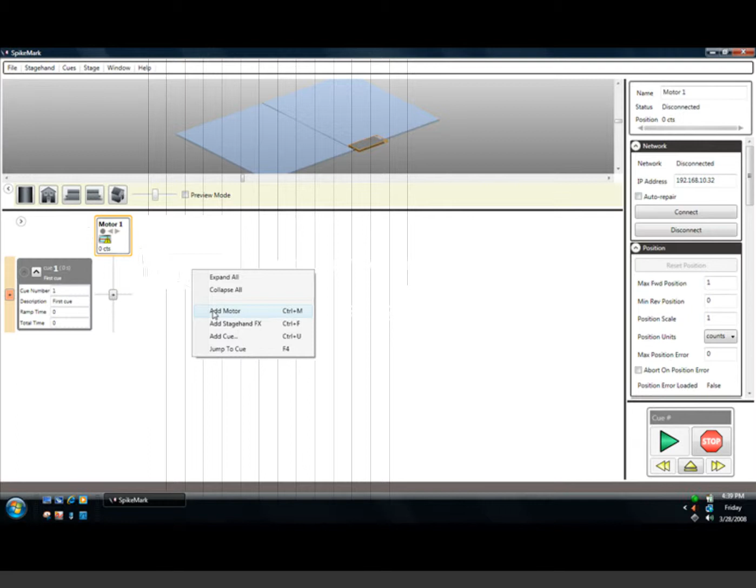Now I could have just as easily gone up to the Stagehand menu and said Add Motor there and given myself a third motor. The only reason why I want to do this is I want to point out that whatever motor is selected here, which you can see with the orange highlight around the column header, is the motor that will be edited in the editing window to the side. So if I select motor 2, we can see here that we've changed to motor 2 parameters.

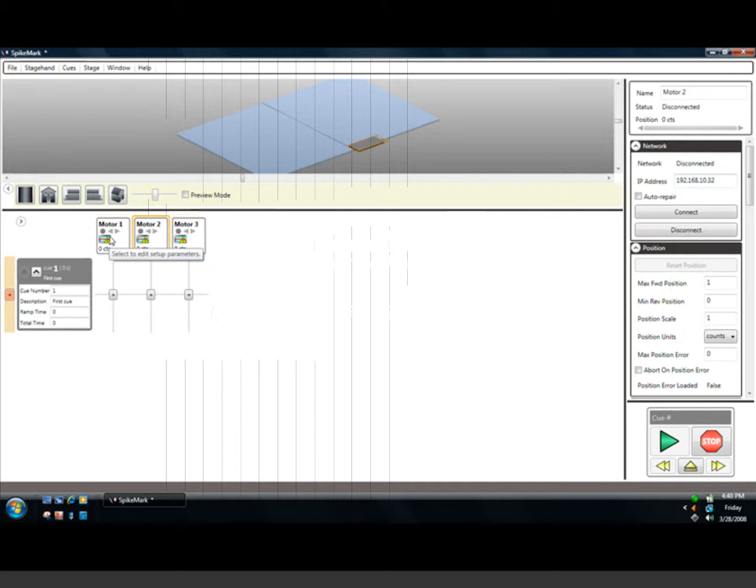I'm going to take motor 1, and this is the motor I want to work with today. So the first thing I'm going to do is try to connect to it. I know that my stagehand is actually at 192.168.10.100 today. So I'm going to type in that IP address and press the connect button. Now it tells me it's connecting.

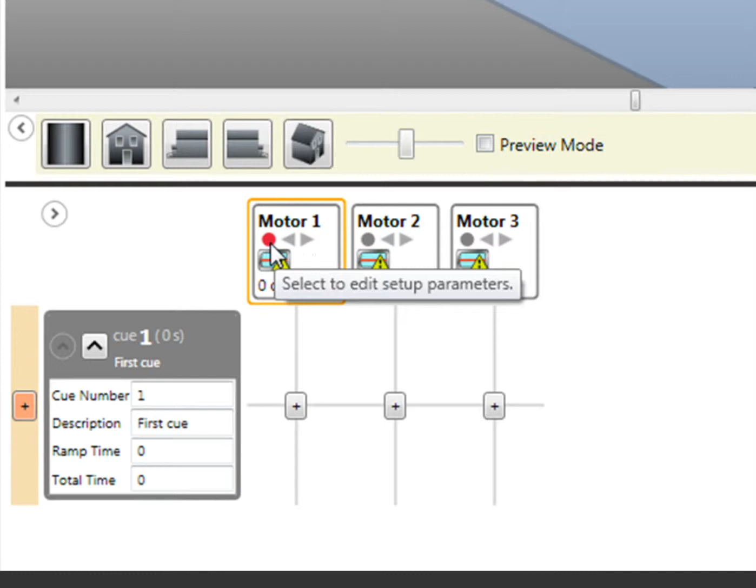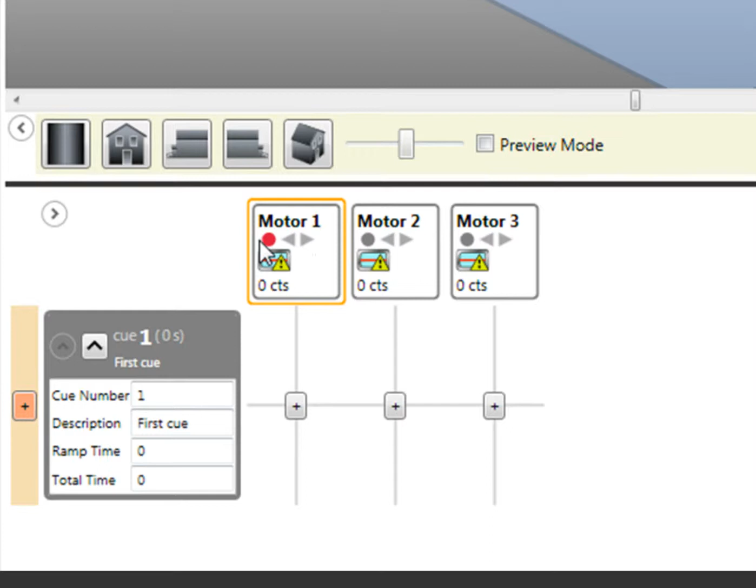I can see here in the column header that there's a yellow indicator light that tells me that the network connection is not yet established. A gray symbol means that it is idle, that it's disconnected. Yellow is connecting. Red means that there's an error, that we weren't able to connect. But what we really wanted to see was green, which would show us that we, of course, have a good network connection. Now this is a slightly contrived example because I knew that this wasn't going to connect today.

I wanted to do this just to point out the most common problem we see when trying to get a motor connected for the first time. I'm going to go into my network connection panel. If I go to control panels, and then there should be something in here called network, or network and sharing, depending on which version of Windows you are using. We're using Vista today.

Local area connection, that's my wired connection. I want to view the status. Now I want to hit the properties button, and I have to give it permission to do what I want to do. And we can see in here the Internet Protocol version 4, TCP/IP v4. That's us. We want to take a look at the properties of our network card. And here's the culprit. Right now it's set for obtain IP address automatically.

Now that's the normal thing you'd want to do if you were connecting through a router or through a broadband modem or something to the internet. We of course don't want to do that. We want to connect to our motor, and in order to do that we need to use a static IP address. So we'll say use the following IP address. And now the key here is we've got to exactly match the first three sections of this number.

So 192.168.10. And now I'm going to physically click into this last field, because if I don't physically click into it, it will continue to add numbers into the third field. So I click into this field, and I'm just going to punch in 20 today. Doesn't really matter. It just needs to be a unique address where the first three fields, 192.168.10, have to match my stagehand, and then this last number has to be unique on the network.

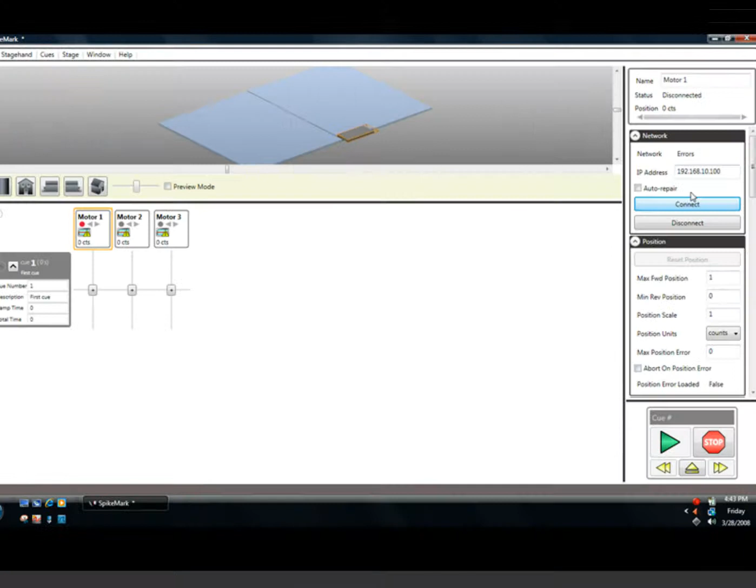I'm going to press Tab just to let it fill in the subnet mask for me. That's good. Hit OK. Hit OK. Hit Close. Close my control panel window. And now, if we try to connect, we should be able to. And look at that. So now with the IP address correctly set on my computer, I can connect to that stagehand without any problem. So my network status says connected here.

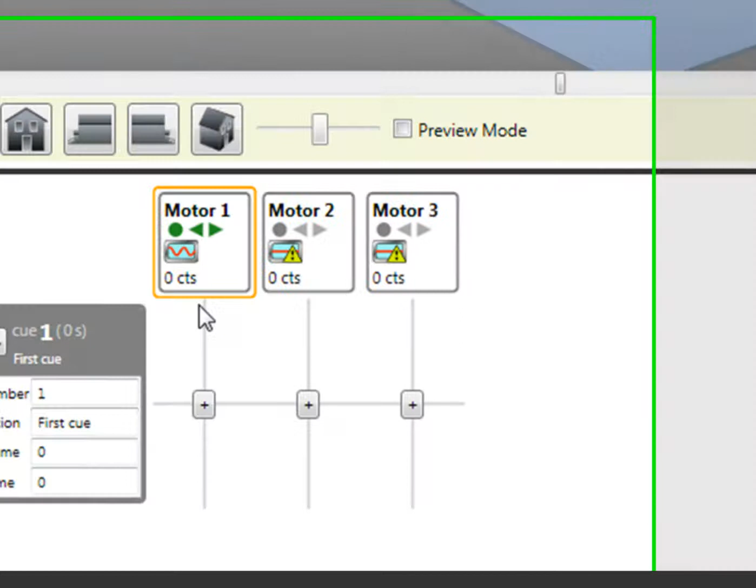I can see that I have a green status indicator here and here, which indicates that both my reverse limit and my forward limit switch are clear. That's mirrored in the cue grid, where here I get the motor name, I get the network status indicator, which is the circle. The left facing arrow is my reverse limit indicator. Green means clear, red would mean that it's struck, and then gray would mean that we don't know what it is because there's no network connection.

Right facing arrow is forward. The color code is, of course, the same as it is with the left facing arrow, or the reverse limit. Underneath that window, I have this little icon here. This is the icon that tells me the status of that stagehand. This little heartbeat icon tells me that that motor is connected, but it's idle. So it's just sitting there humming along. You can see these motors both have a flat line indicator with a little exclamation point showing that they're disconnected currently. So this is idle, this is disconnected.

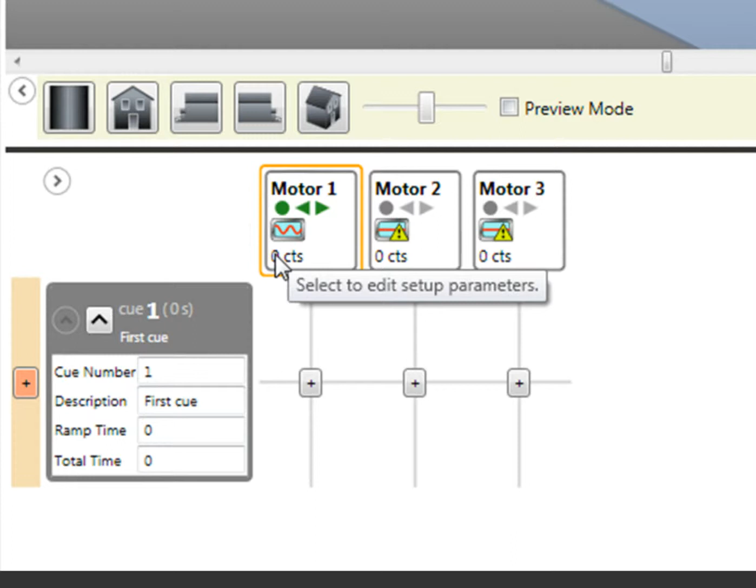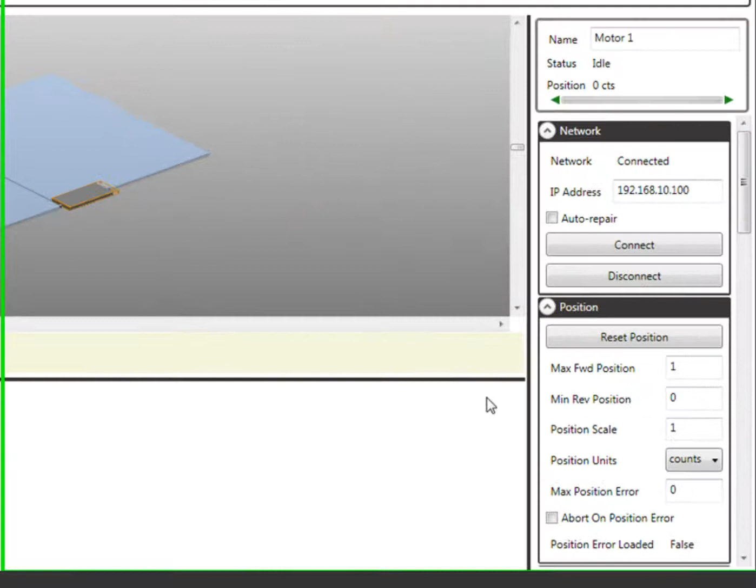Beneath that, I have a position number. This tells me that I'm at 0 counts right now. Since I haven't set up any other parameters, the computer is going to read everything to me in raw encoder counts. I'm going to expand my view a little bit here. Alright, so I've got my motor connected now, and with my motor still selected, I'm going to come over here to the motor editing pane. I'm going to start collapsing some of these properties down. What I'm looking for is the manual motor controls.

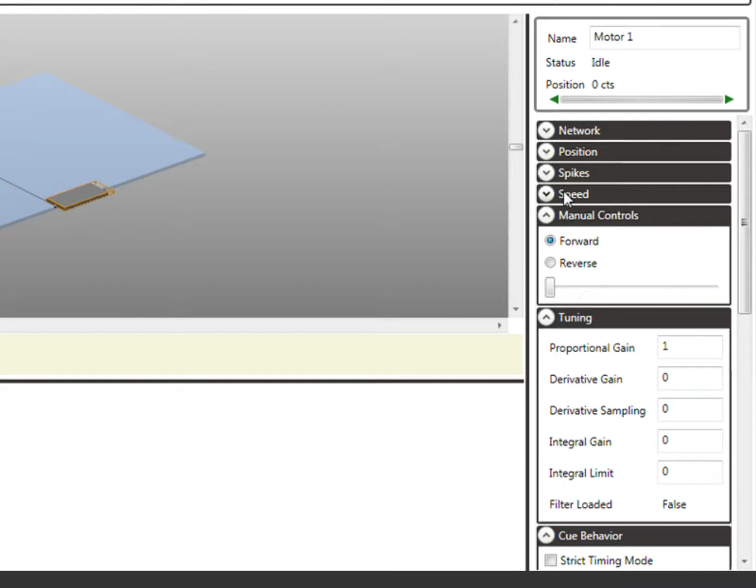Here we go. I'm going to select the forward direction, and then I'm going to ramp this slider up to turn it on and drive it forward. But first, I'm actually going to reopen my speed panel, because this will tell me how fast the motor is moving while it's under my manual control.

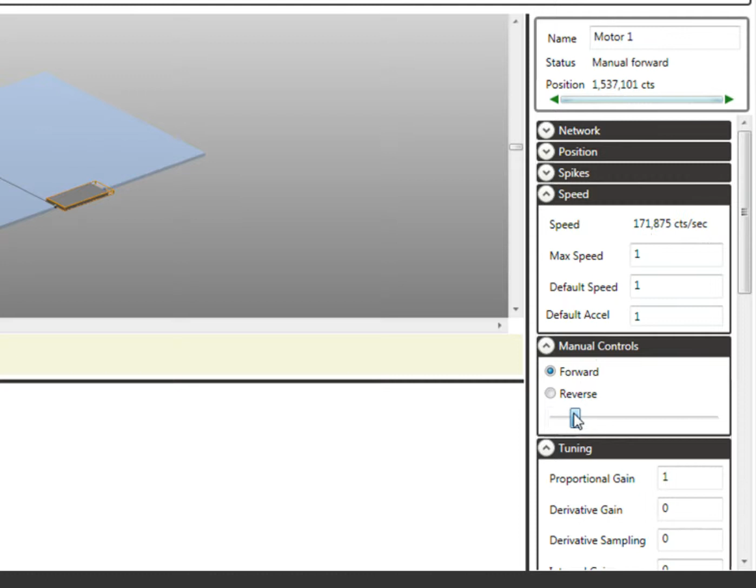Alright, so I've pressed the button, I'm ramping it up. We can see that we are getting good feedback from that encoder. The motor counts are going forward, they're getting bigger and bigger every second. That's just what we like to see. So now if I try in the reverse direction, I want to make sure that the encoder counts start going back down.